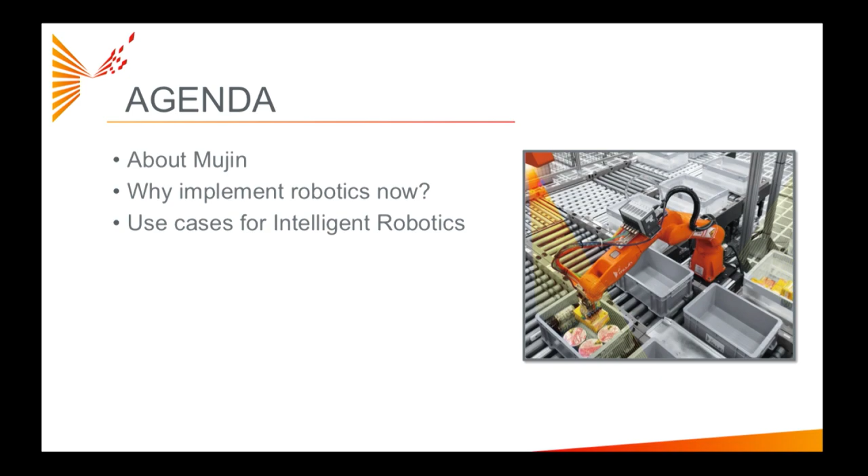To set the stage a little bit, I've got a bit of an agenda. We are here to tell you more about Mujin, a robotics technology company, and why you should really be considering intelligent robotics for your warehouse operations. Then we'll go into use cases for intelligent robots, talking about palletizing, depalletizing, piece picking, all of which we're showcasing here at Modex 2022.

So first, a little bit about Mujin. We were founded back in 2011 in Tokyo, Japan, but we are an international organization. It's an English-speaking office, and we have folks from all over the world there to help advance the cause for intelligent robotics. We were founded by Issei Takino on the left, our CEO of our global business, and Rosen Diankov on the right, our CTO of Mujin.

We're actually closer to around 200 employees now with our recent U.S. expansion, and we really have a lot of great talent from across the world to help us deploy and create unique robotics solutions. We have about 600 intelligent robotics systems out there globally, spanning 3 countries with Japan, China, and now the U.S., and we have a lot of awards and intellectual property that we've created along the way.

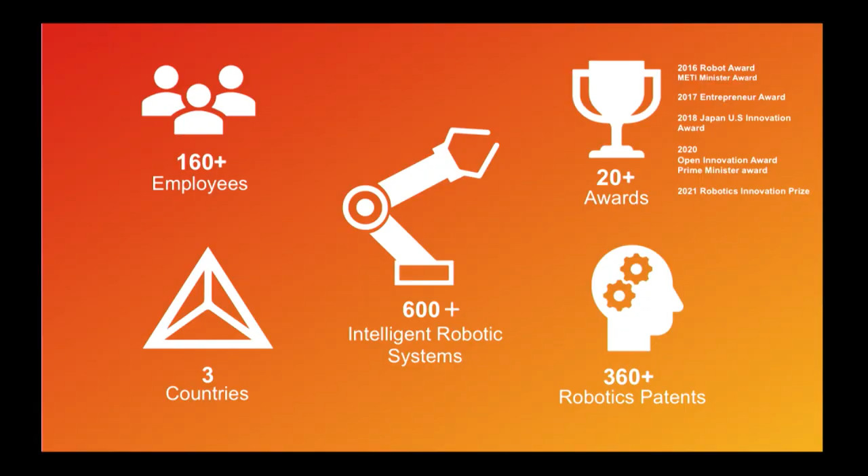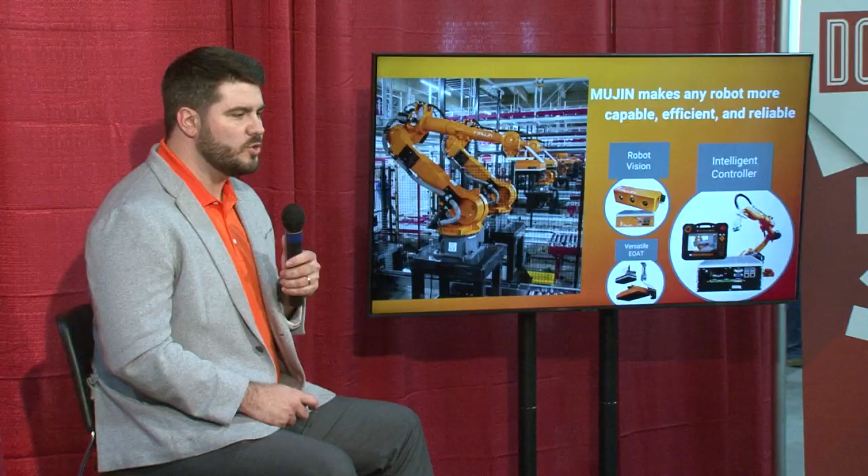So in our booth today we have Fanuc, Yaskawa, Motoman, Kawasaki, and Mitsubishi robots doing all different warehouse robotics tasks. The Mujin controller actually drives those robots directly to the servos to create intelligent robots. This makes them more capable and more reliable within applications that have a lot of variability, like mixed case palletizing or depalletizing.

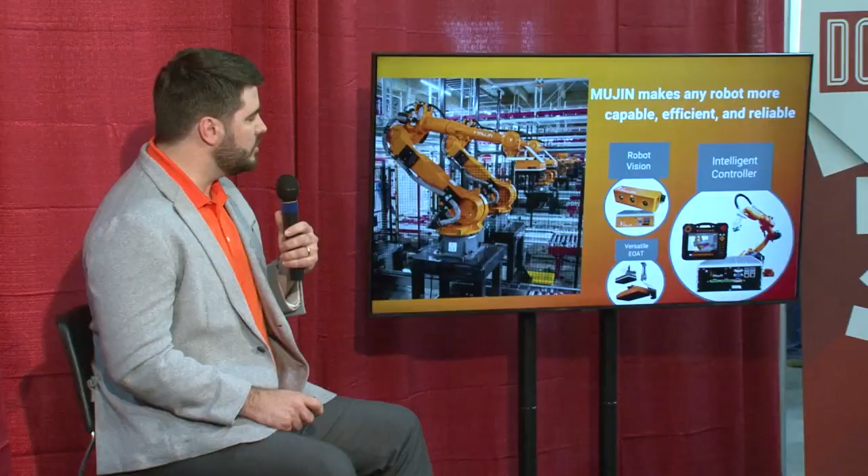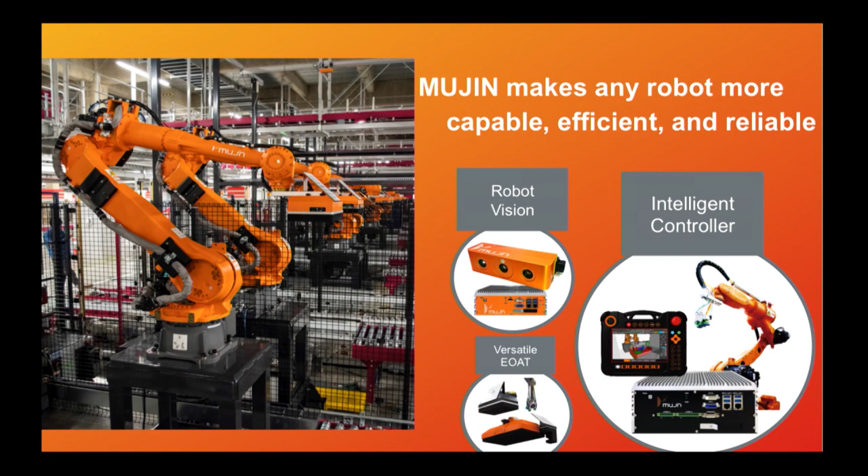So we combine that advanced robot control with the latest and greatest 3D vision technologies, and we also create versatile end-of-arm tooling - really smart grippers that have things like force torque sensing and vacuum sensing to ultimately create this intelligent control loop of thinking, sensing, and acting on the fly. All of our motion is created in real time based on the targets in front of the robot.

So let's talk a little bit about the situation out there in distribution and fulfillment. Consumer behavior is driving a lot of growth in e-commerce and in retail as well. COVID-19 has for sure increased that growth in the short term, and we see that sales could double from 2021 by 2025 in the e-commerce space.

We really see also that while this demand is there and there's huge growth potential, most warehouse operations folks are struggling with finding the labor to actually fulfill this demand. They say that's really the biggest challenge today - the availability and retention of labor within the warehouse. And actually, it's a huge part of that operational cost; it's really built into the infrastructure of the warehouse.

And really, it's not just a short-term thing with COVID-19. There are statistics out there showing that this is really a long-term trend, that the labor force participation rate is going to be worse and worse as time goes on. So companies are facing a huge increase in demand from both long and short-term trends, and they're constrained by space and labor availability, really looking for more effective and resilient means to fulfill orders in times like we've had recently with the global pandemic.

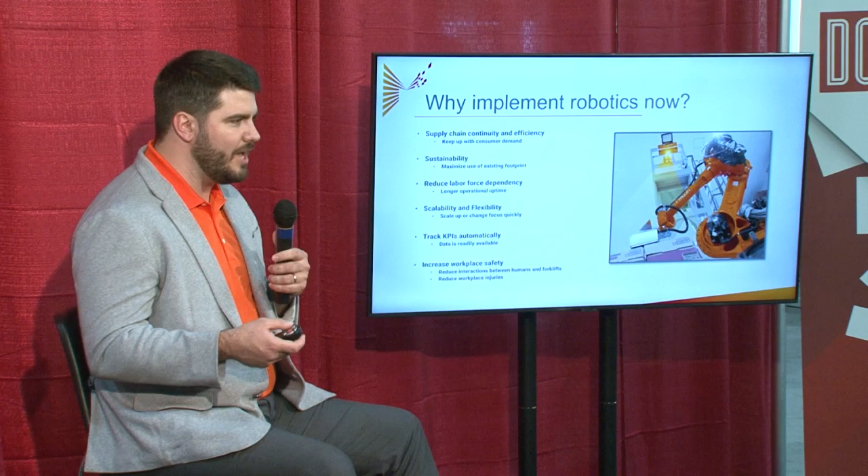And we think that robotics is really the key to unlock warehouse automation, end-to-end warehouse automation solutions. So why implement robotics now? There's a lot of reasons to do that. We can look at the traditional reason for deploying robotics - they're very reliable. It's a machine that does the same thing over and over again.

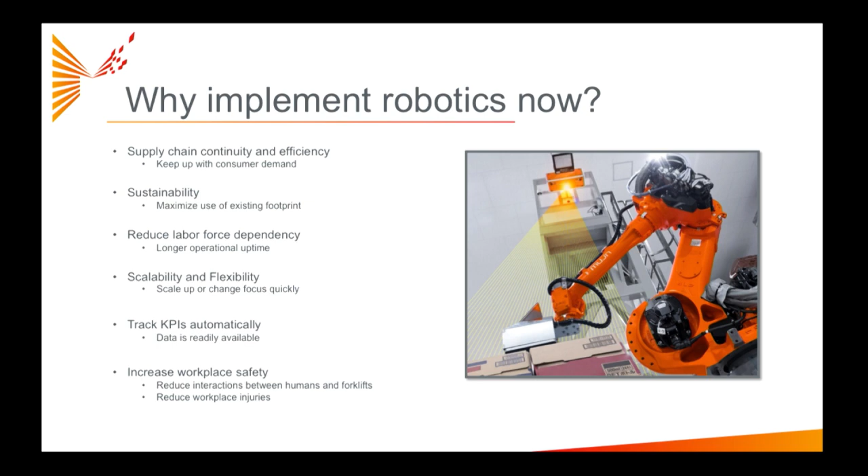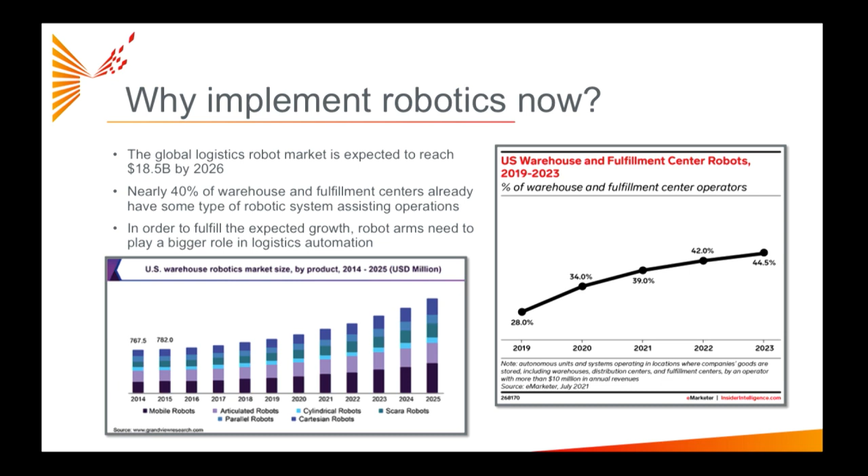So really automotive has created this robotics technology into something that is very reliable, very repeatable, something that is scalable and flexible, and also something that's really easy to track your warehouse, what's going on within your warehouse. So there's a lot of reasons to deploy robotics, and actually most companies are already testing or starting with robotics now. Nearly 40% of all warehouse and fulfillment centers have some type of robotics systems within their warehouse. So really, you should be hopping on this train now if you aren't considering warehouse robotics today.

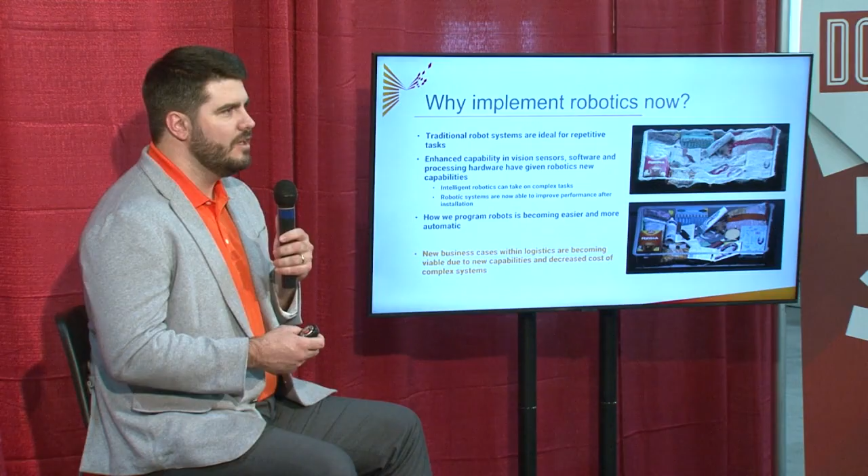In the past, robotics have been really good at doing the same thing over and over again. You have to fixture things, but in the warehouse, that's really not feasible. So actually, over the last 5 years or so, it's really the vision technology, 3D vision, that's really driving warehouse robotics. What's making robots more capable to do some of these difficult applications where there's a lot of variability, where you have your products just loosely placed inside of a tote or a box, or you have various cases, various size cases, mixed cases on a pallet that you need to depalletize or build a mixed case pallet. It's the 3D vision that's enabling the robotics technology and really creating more use cases within logistics today.

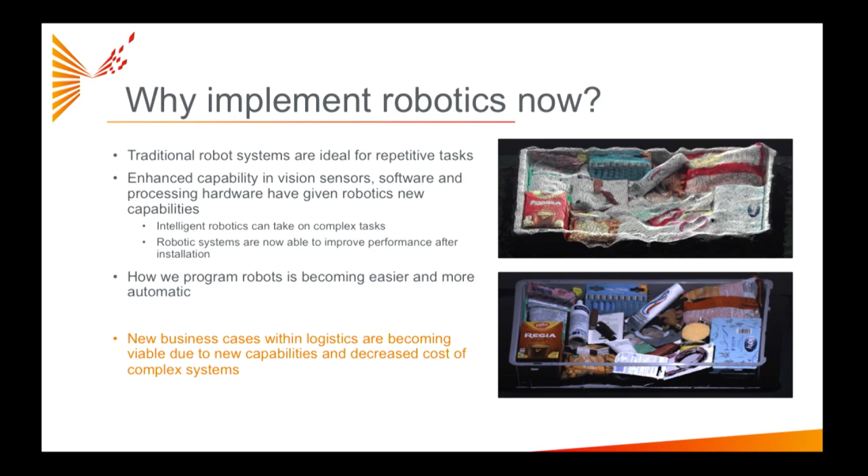So what are some of those use cases? We are showcasing all of these in our booth here at Modex, and we have production-ready solutions for all of these types of applications, for palletizing, for depalletizing, for piece picking. Those are really the three that we're going to highlight today.

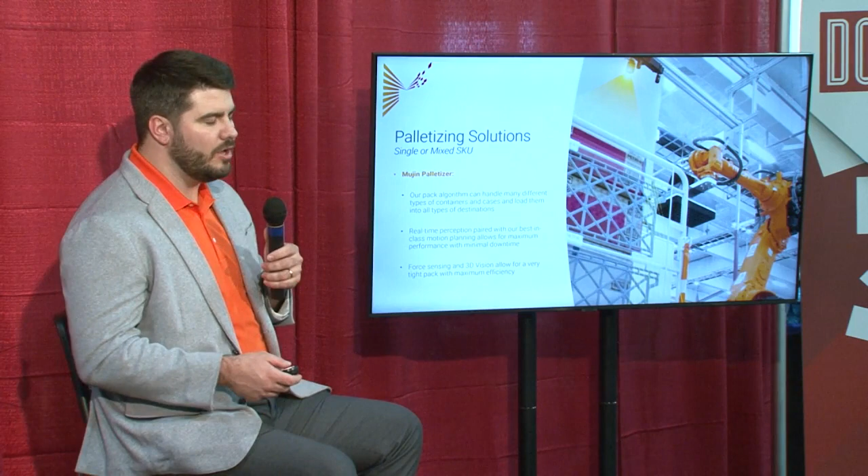So with palletizing, traditionally to do mixed case palletizing, for instance, you have to have a lot of upstream automation to create the appropriate sequence so that you can then build a mixed case pallet. But with intelligent robotics, we're able to control, using vision, we're able to see our targets, and we're able to control robots in the real-time loop to create this more advanced decision making. So actually, we do not necessarily need a lot of upstream automation, maybe an ASRS system. We can buffer and actually resequence cases all within the robotics work cell.

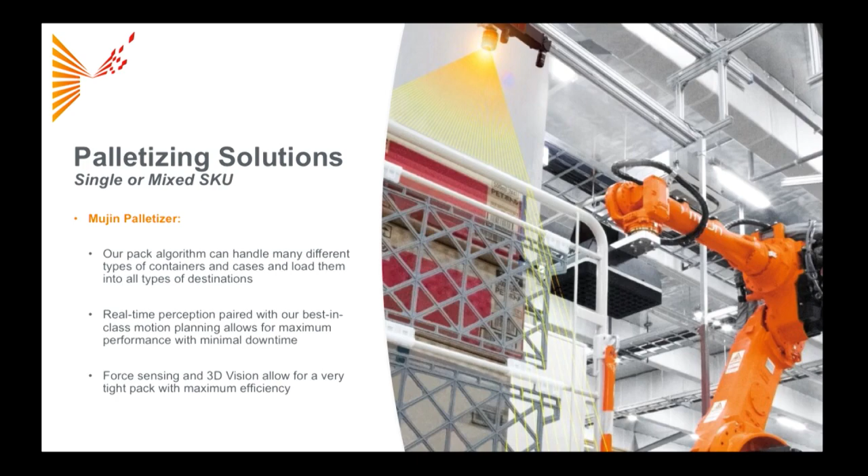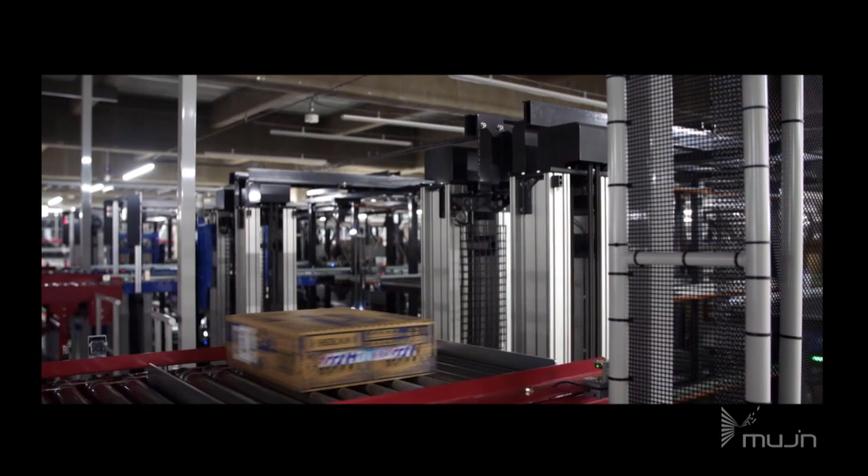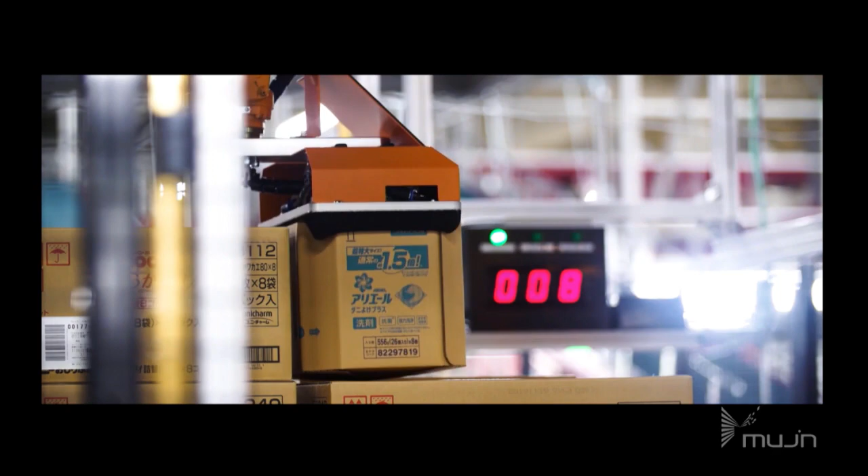So what you'll see here in the next video is a full end-to-end solution with an automatic storage and retrieval system upstream. Mujin is actually building all of the pack formations in real time to create the pack on each one of these mixed case pallets. And we're actually also delivering the sequence information to the upstream automation. So the warehouse is telling us here are all of the orders that we are going to have today, and Mujin is then sending back information about what sequence those cases should come in. So this is the most efficient way, the fastest way, the most effective way to do mixed case palletizing today.

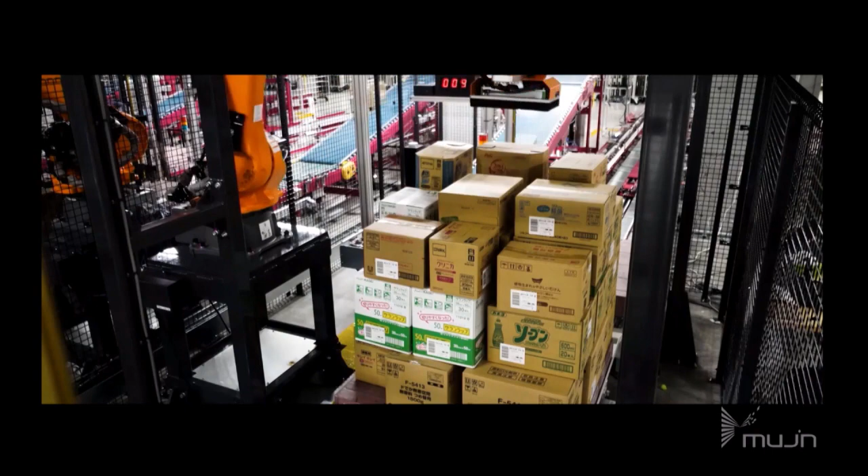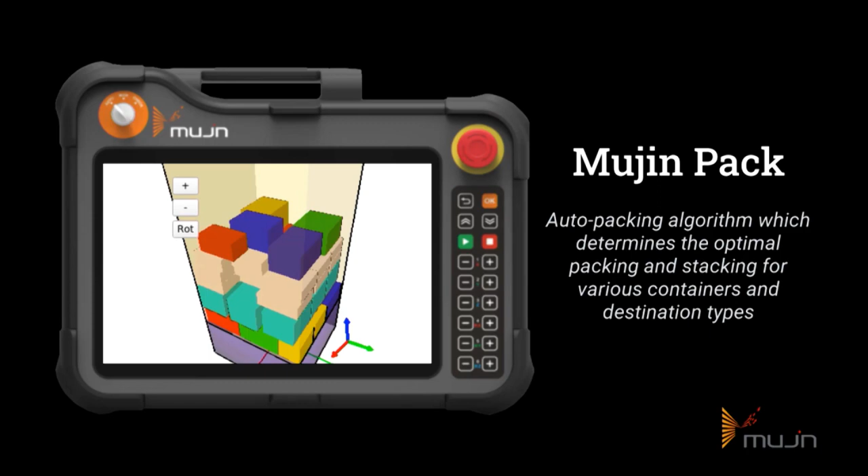But in our booth today, we're actually debuting a new feature to where you can send it to us in any sequence, and we will buffer and then resequence with the robot on the fly. So we're using vision not only to see the targets, the cases within the space, but also the destination. So we're not only building pallets in this instance at Paltac, this use case, but also carts. So building carts, shipper carts as well. Really there's no coding involved, and all of it is done with our intelligent robotics platform, the Mujin controller.

So that's palletizing. Let's go to the induct side of the warehouse and talk a little bit about depalletizing. Really, depalletizing is something that has been achievable in the past, but you kind of have to know what's in front of you. You have to have some constraints built up to understand what is there on the pallet. With 3D vision and actually 2D vision as well, Mujin, we can not know any information about the pallet, any information about the cases that are on the pallet, and will on the fly determine how to pick those cases and induct them into an automated system.

So we call it auto registration. We're using 3D vision to find the length, the width, the height of the object, and also looking at what the physical object looks like in terms of what the top layer looks like in kind of a photorealistic way.

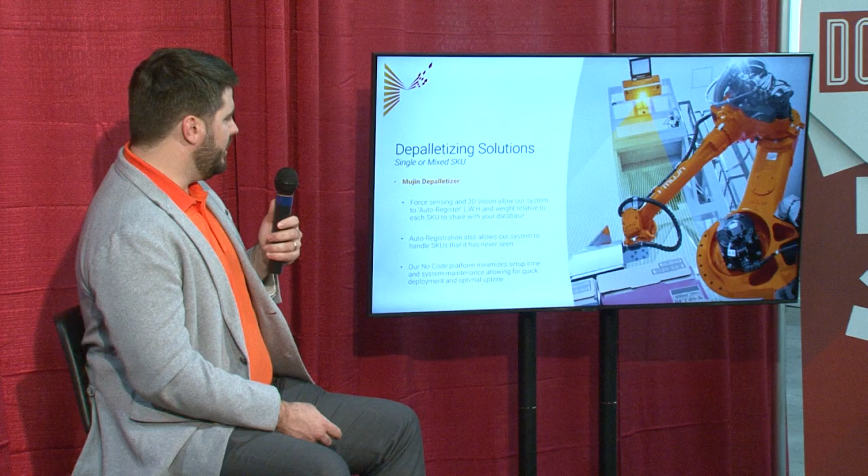And then we also use force torque sensing in the gripper that we manufacture for depalletizing to understand the weight of the item as well. And then if it makes sense for your operation, we can implement barcode reading as well, so you can confirm that this length, width, height, and weight data is actually related to the barcode, the SKU data that you expect for that case.

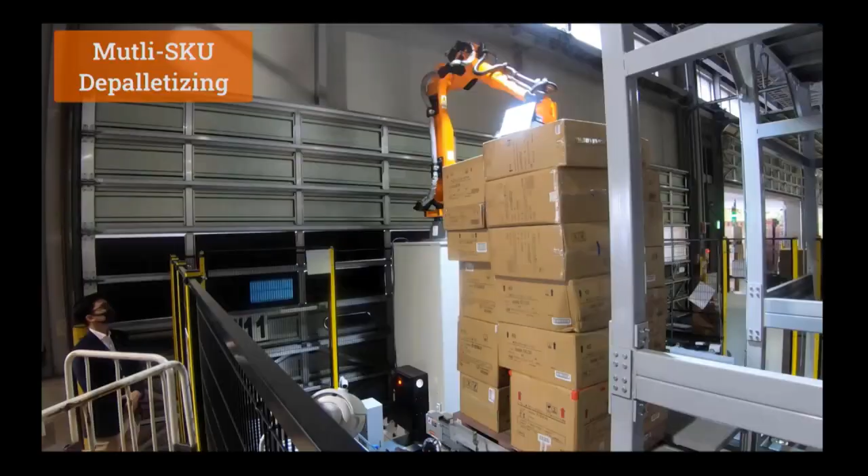And all of that information is available for downstream automation within the warehouse. So let's look at an example, a use case for mixed SKU depalletizing. The Mujin system knows nothing about these cases before they're brought into the system, so there is no external data. We are on the fly determining how to pick these cases, registering all of the length, width, height, and physical properties of the case, and figuring out how to get it to the conveyor.

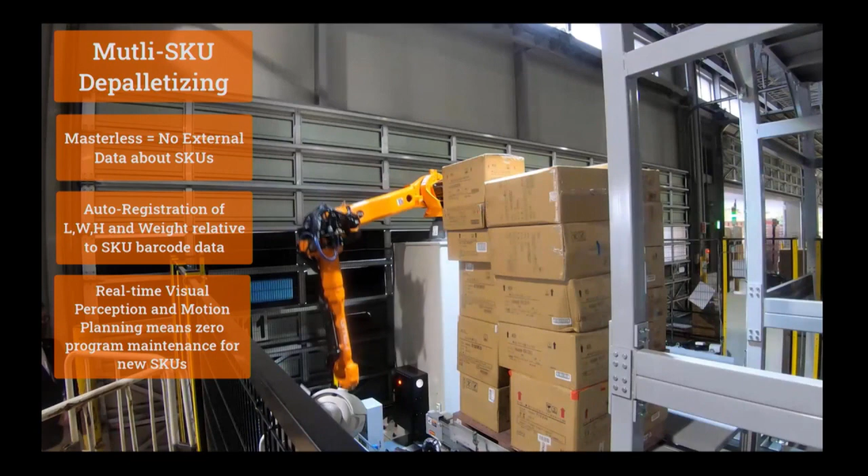One thing we've learned over the years is that it's really difficult to take all of this sensor information from the vision side and make the gripper do the right grasp, and really having all of this under one hood allows us to bring a more intelligent solution. So when we get information from our vision systems that maybe isn't accurate, we can actually check if it's accurate with our gripper. We'll show you that situation here in a moment.

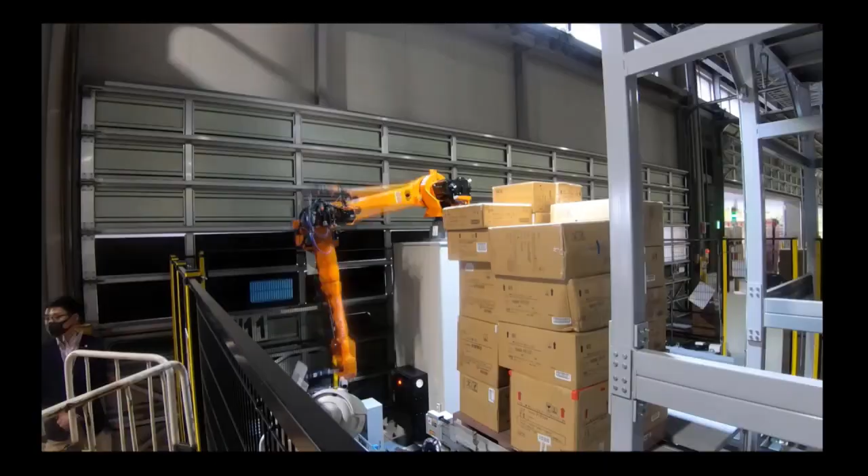We'll speed the video up and get to a point where the vision system actually tells the control system, hey, this is 2 cases, when in fact it was only 1 case. Maybe it got a reflection off the tape or something like that, to where it thought it was 2 cases in that moment. So here it's coming now, this next case.

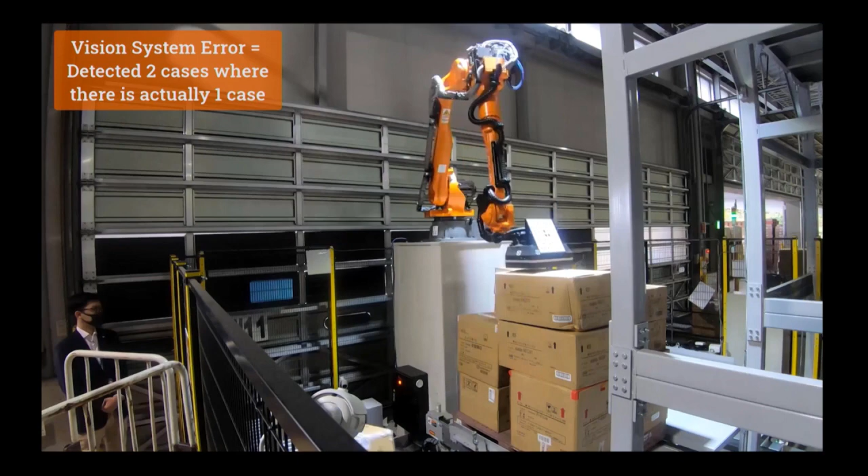There's a vision system error where it sees 2 cases, and the robot goes to pick and immediately recognizes with force torque sensing and vision that actually that is not 2 cases, it is in fact 1 case, and automatically adjusts on the fly to take into account the original issue with the vision system. So again, here it comes. This is the automatic adjustment to really account for some of those things within vision that you just can't account for on the front end. We have this full control loop to be able to account for those things.

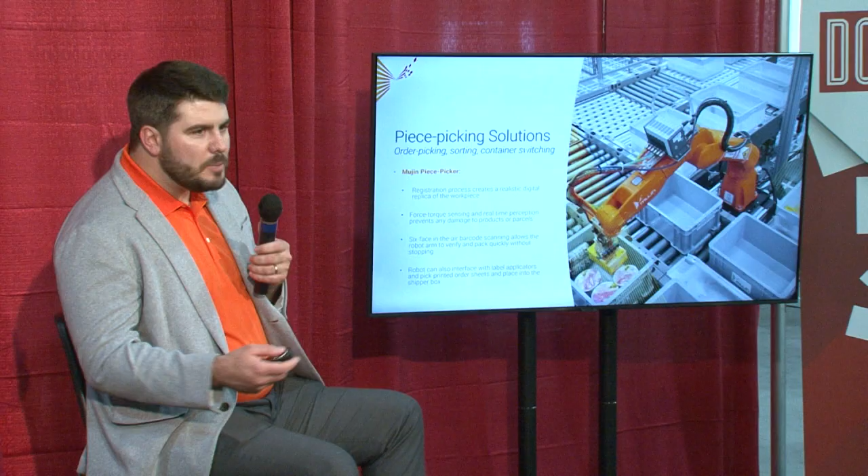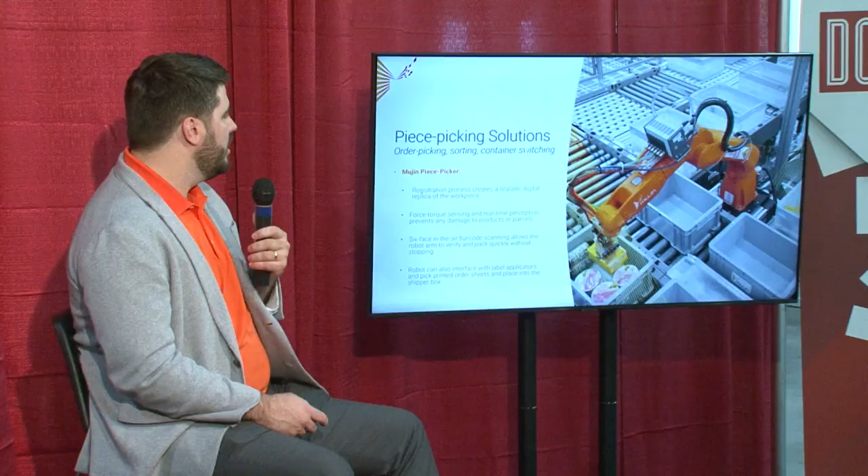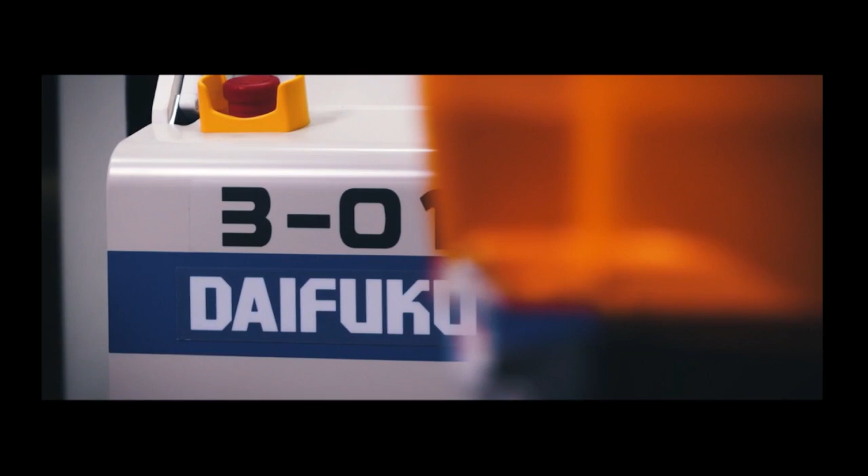So that was depalletizing, and then the last thing I'll tell you about is piece picking, or each picking - there's a lot of different names for this type of application - but essentially it's taking your primary packaged good, your product, and putting it away into storage, or doing order fulfillment out of automated storage. So this is an application for Fast Retailing where there was an automated storage system, and they were actually doing a goods-to-person application for order fulfillment, and they tasked us with creating a robotic solution for that order fulfillment.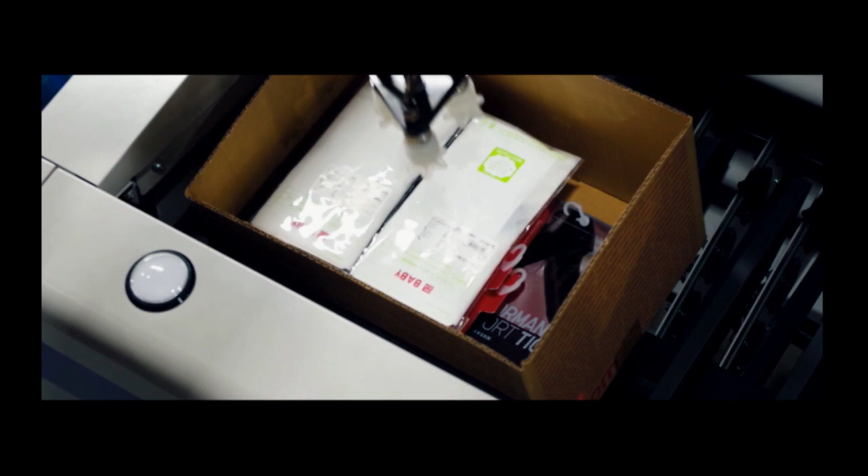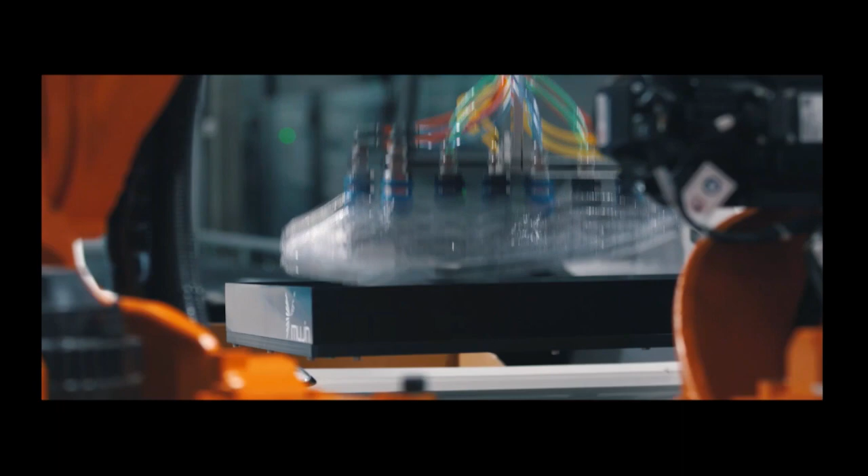You'll also see that we have multiple tools here, and one of our tools is actually grabbing the order sheet and putting it in the box, so that all of the things that need to be in the box before it gets to the customer are there.

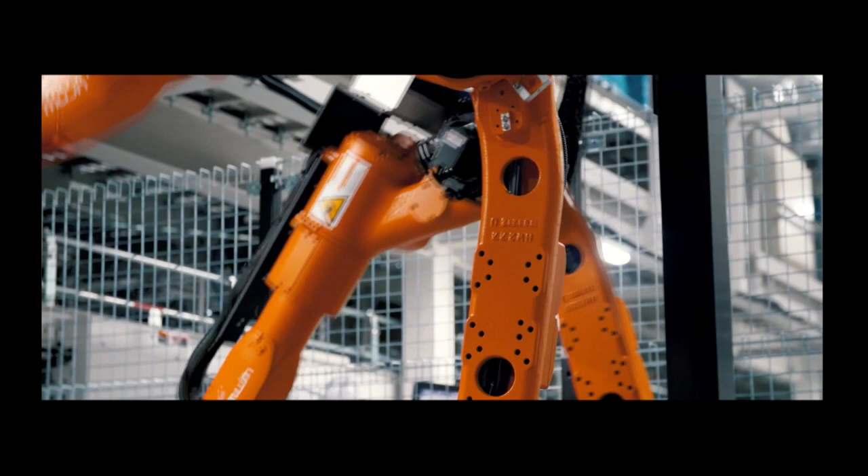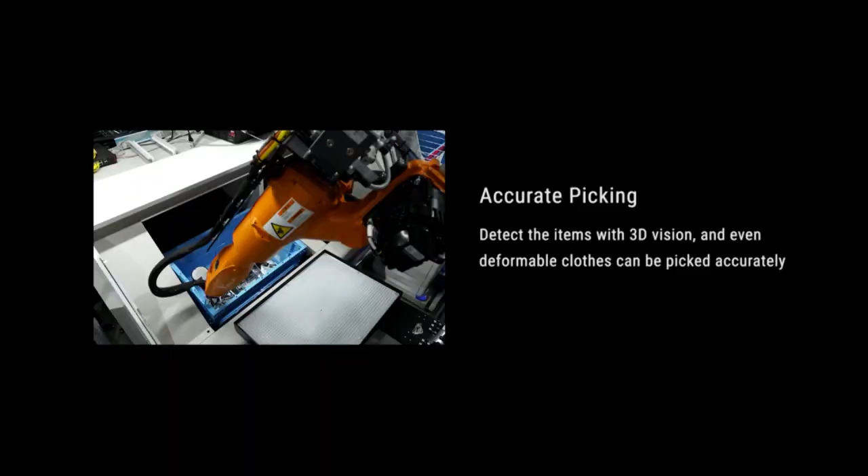So these are just a few examples of some of the applications that we're showcasing here at Modex. And also, these are all solutions that we've already delivered into production and are really ready for customers here in the U.S., for warehouse operators here in the U.S., to deploy more picking systems to create end-to-end solutions with AGVs, conveyor systems, sortation systems, ASRS systems, where we are working with a lot of different system integrator partners to create these full end-to-end solutions. And robotic picking and packing is really the key to opening up automation within your warehouse.